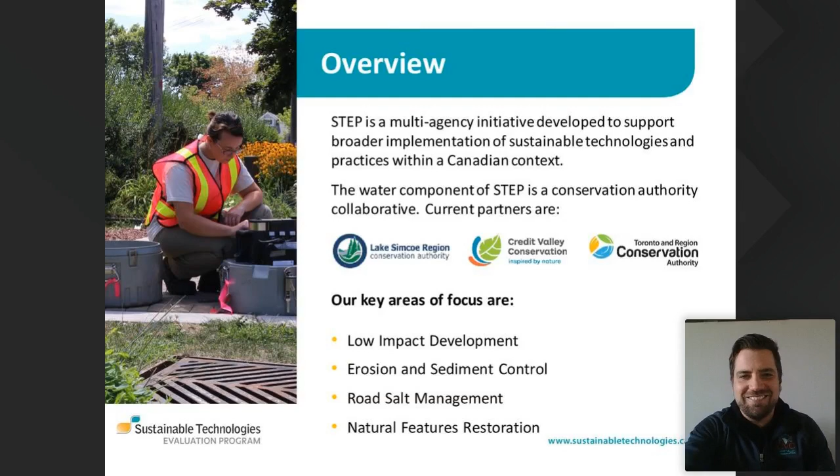Okay, so the next button, just at the bottom of the slide there. Yeah. All right, there we go. Thank you. You're welcome.

So starting at the basics, the hydrological cycle is a four-step process. It rains, it lands on the ground, the sun comes out and heats up, water evaporates or transpires from plants and vegetation, rises up, and as it cools forms clouds, and then comes back down as precipitation. As you can see from the slide, the way the landscape is formed directly impacts the flow and movement of water. So when we put buildings, cities, towns and communities there, that has an impact on the hydrological cycle.

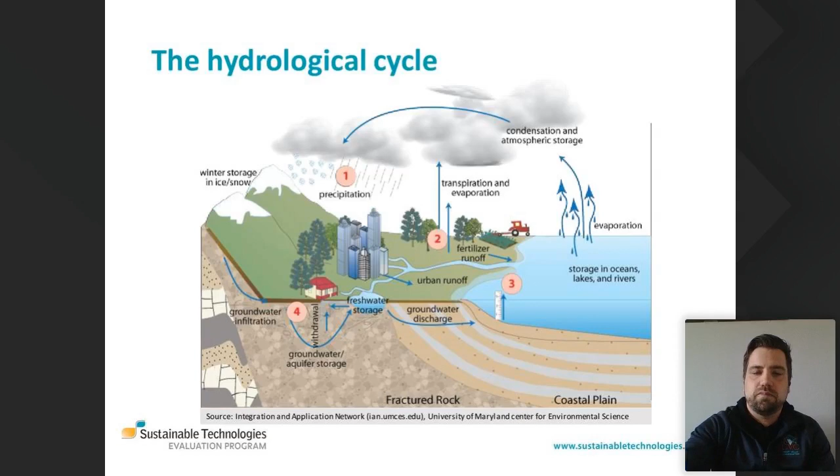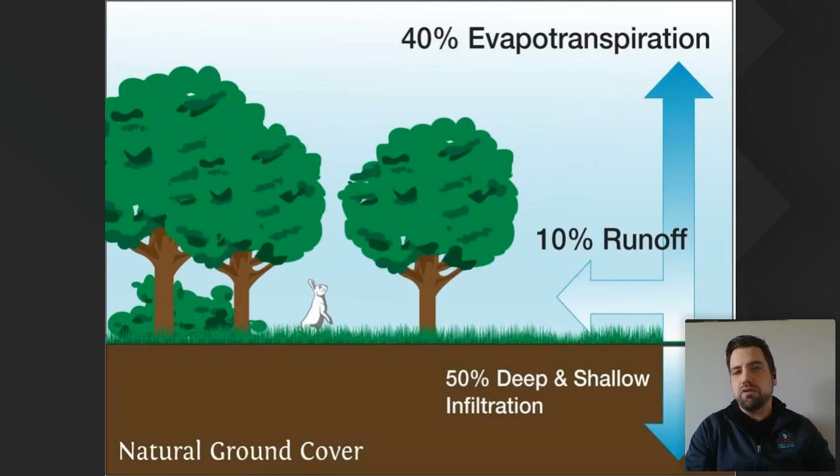So in undeveloped conditions, what we typically see is most of the water, so 40%, is taken up by trees and vegetation, and then 50% is infiltrated into the ground, and only 10% of it actually comes in the form of runoff, which then goes into a receiving creek or a stream or river or lake. So that's without that parcel of land being developed.

Then as we moved into those cities or into towns, we're obviously increasing the hard surface footprint. So we're removing that natural vegetation, we're removing those soils, and then we're hardening those surfaces. So one can only guess, right, as to what happens. Obviously, if you have a hard surface, you're increasing your amount of runoff, and you're decreasing infiltration, and you're also decreasing evapotranspiration.

So there's been a lot of studies that have shown these relationships between hard surface footprint and the health of the watershed. So in that statement at the top of the slide, we talk about pervious versus impervious. As soon as we go beyond 10% impervious area, so hard surface footprint area within a watershed or the area draining into a receiving creek, we have a negative impact.

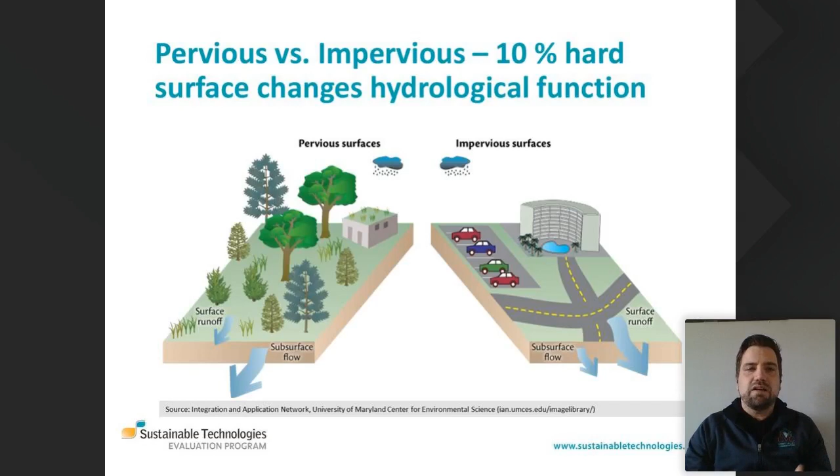So that's that relationship. So if we look at this relationship curve, it's saying the same thing as the slide before. As soon as you go above 10%, you go from a protected watershed to an impacted watershed, or you go from a protected stream to an impacted stream. And as soon as you get to 25%, that's where you start to see severe degradation of our natural water resources.

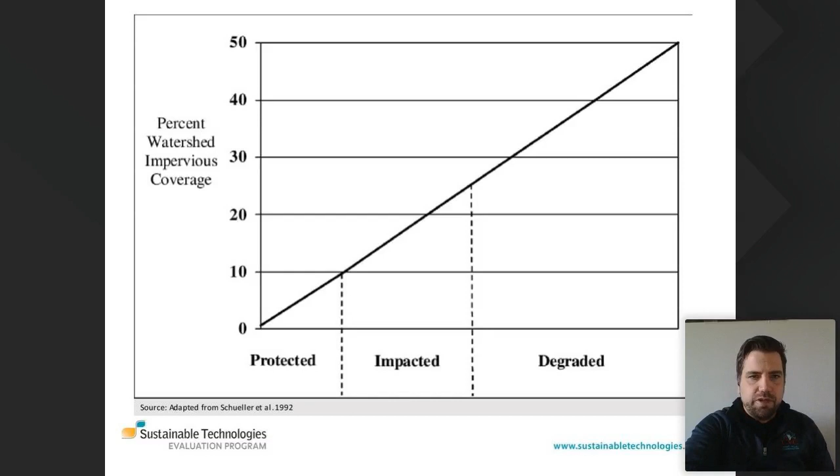So why is this all important? Well, it costs a lot of money to treat water. It costs a lot of money to find clean sources of water. We cannot develop a parcel of land if we don't have access to clean drinking water. And the impacts to our runoff directly impact the quality of drinking water that we have either in the ground or within our receiving streams.

And this isn't unique to Mississauga. It's not unique necessarily to Milton, but the map here shows the progress of development. So the stuff in light gray was really development up to the 1970s and 80s. And then as you get into those darker grays, it goes from 2001 all the way to 2011. So you can see the expansion of cities and how the hard surface footprint of the Golden Horseshoe or the greater Toronto area has increased over time.

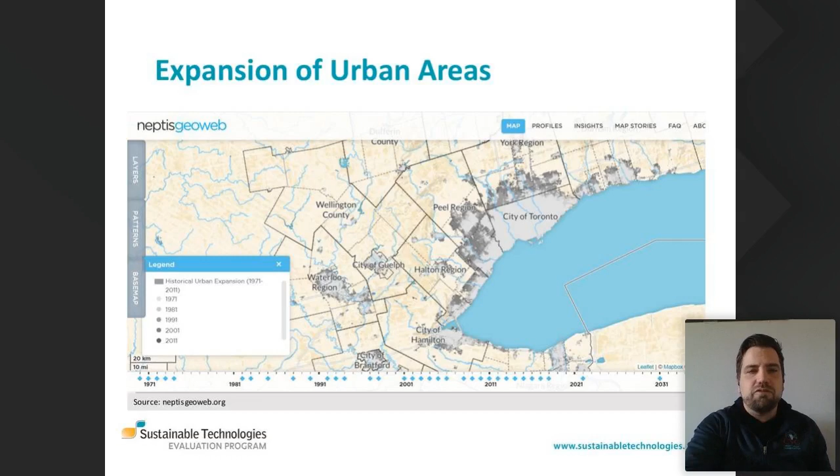So what does that mean for water management? Well, it's got to go somewhere. And where does it typically go? Let me restart from that. Everything pretty much built up to 1991, between 85 and 91, doesn't have any formal treatment of stormwater management. It doesn't have flood control, and it wasn't built to meet any water quality standards either.

So what we see here on this slide deck is essentially what is for the vast majority of the GTA, including Milton, including Kitchener, where I live. So water is collected, goes off of roofs, down the downspout, out towards the driveway, into the road, into the catch basin, and then out to a receiving stream. So there's no treatment. Water is quickly and effectively conveyed from our cities into a receiving stream.

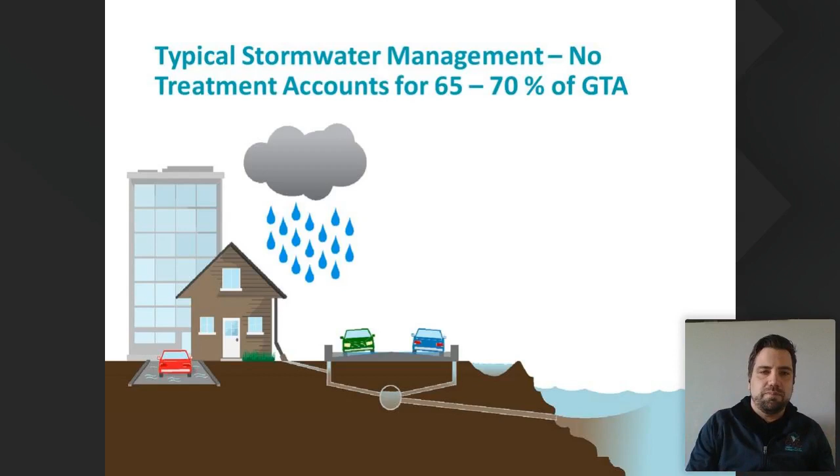The challenge or the problem with that is that type of management of water has impacts to our receiving streams and to the Great Lakes, to our groundwater, and it causes a lot of issues, a lot of damages, and this is what we have seen quite extensively over the last 20 years. So we've seen a rise in high intensity rain events.

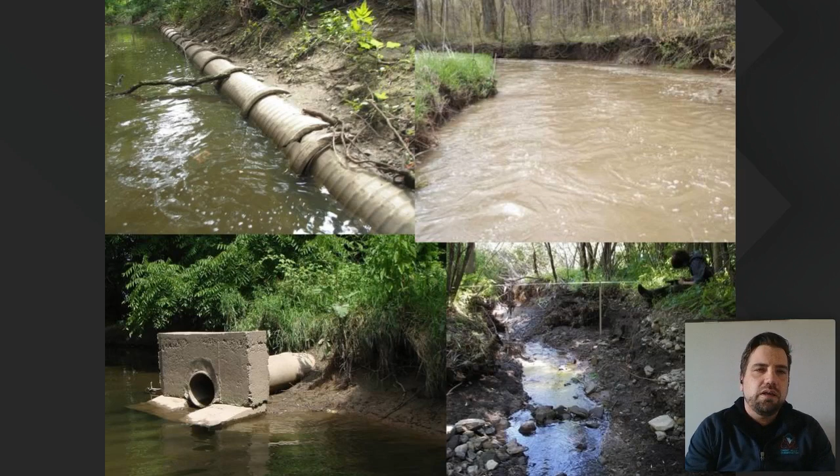So here are some shots. This is Fletcher's Creek in Brampton. So it flows from Brampton and then it outlets into the Credit River. And this is a challenge that municipalities are dealing with. So over time, because of these high intensity rain events, we cause erosion, and it erodes away where our infrastructure is. So often we use our river corridors to also place critical infrastructure.

So at the bottom left, we have a stormwater outfall. On the top left, we have potentially a water main or a sanitary pipe, something conveying that water from one point to another. Here we have base flow, higher increased conditions in terms of flows after a rain event. So this entire watershed has stormwater ponds, but even with stormwater ponds, we're seeing these ponds all release the water at the same time, which has negative downstream impacts. And then in the summertime, we tend to have very low base flow conditions because not enough water is getting back into the ground.

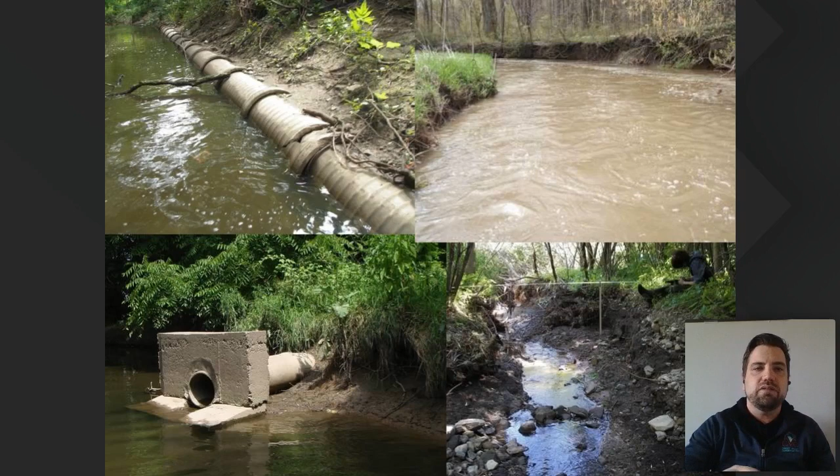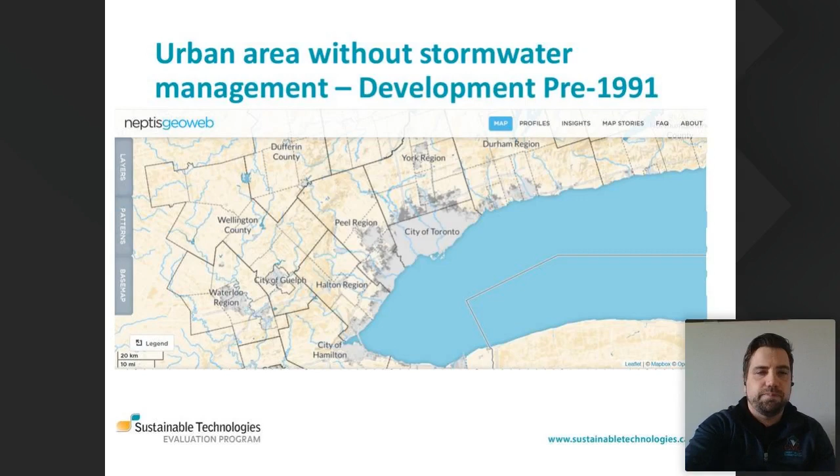And as I highlighted before, we're seeing a greater frequency of what we say 1 in 100 year storm events happening over the last 14 years, but in general, it's been over the last 20 years, because we have the storm event in 2004 there. So in Mississauga itself, we had a flood event in 2005, and then another one in 2013, and then we had a flood event in Burlington in 2014. Kitchener's had a couple in 2016. So there's been a number of events, so it's becoming quite a common problem to deal with. Hard surface footprint, lots of water, and big areas within existing cities where there's nothing holding back that water.

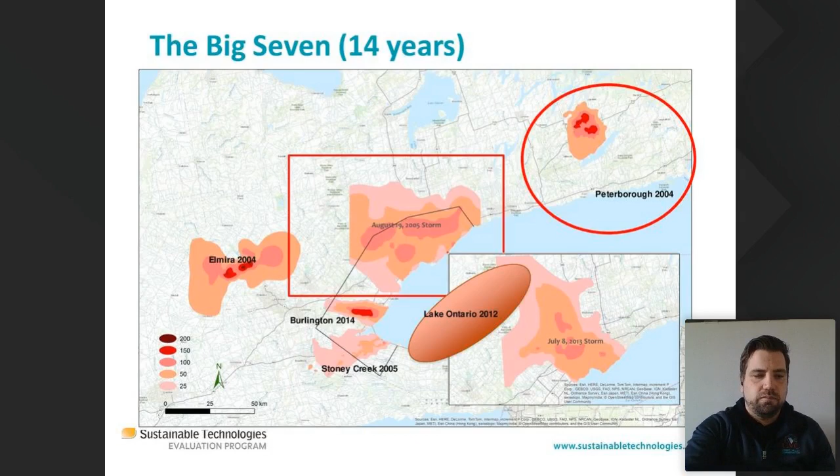Basement flooding is on the rise. Water damage to homes is now the #1 expense for insurance companies. So it's also a struggle for not only individuals, but the companies that are insuring these individuals as well. And then for municipalities, before we showed you some infrastructure within the Fletcher's Creek corridor being eroded away. Well, after this water collects under the bridges, often stuff's ripped apart. So here was a shot, I believe it was on Dixie Road in Mississauga after the 2013 flood event. But again, all this stuff needs to be repaired, replaced, and it's quite expensive.

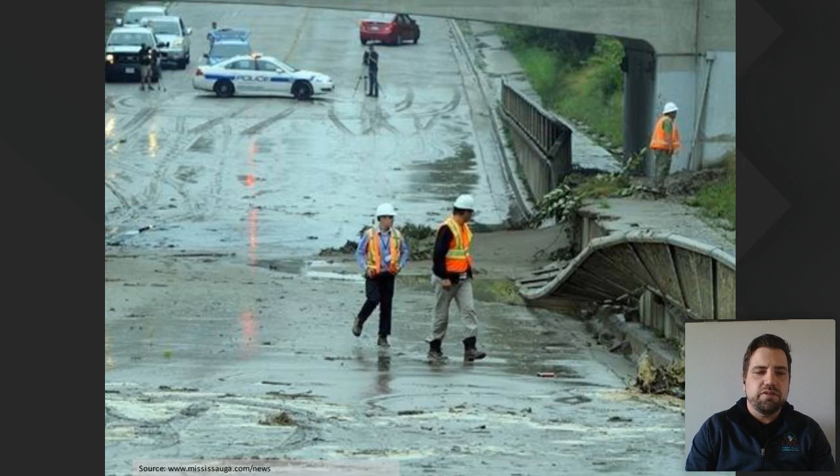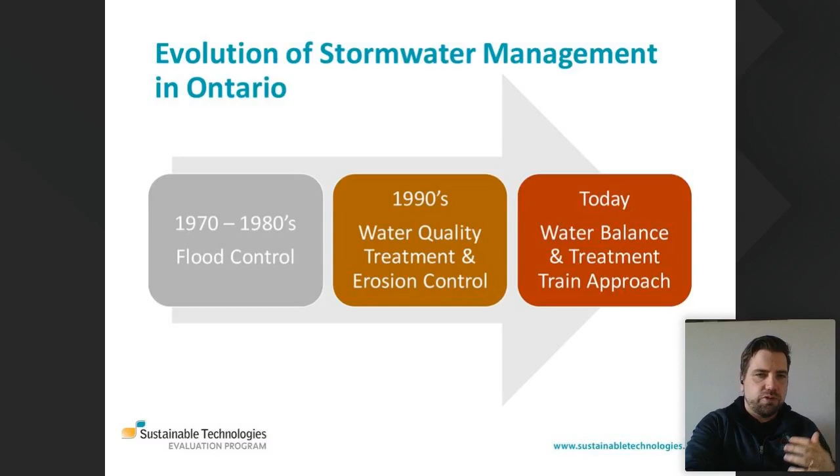So as I highlighted, pretty much up to 1991, we only had very minimal stormwater management within existing cities. And most of it was just quickly conveying water from property or from hard surface to a receiving stream. After 1991, we got into looking at water quality and trying to make improvements as ways that we could treat runoff to reduce the amount of sediment being dumped into receiving streams. And then now what we're focusing on is not only water quality, but also water balance. So looking at infiltration capacity, trying to get the water back into the ground, being taken up by trees, vegetation, etc., so that when it rains, water is going into the ground, and only a portion of it is turning into runoff and going into receiving creeks. So for us to do that, we take what we call a treatment train approach or an integrated water management approach.

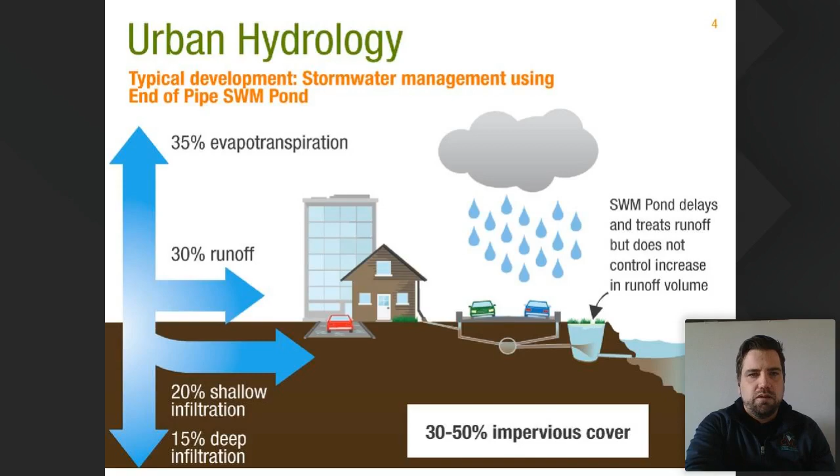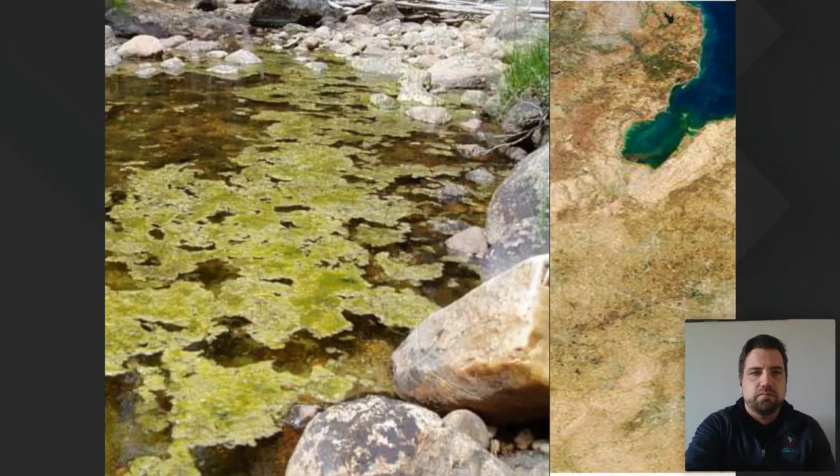So the first step of what we saw is, okay, we need to provide flood control and erosion control. And this primarily took the form of stormwater ponds. And then as we started focusing on water quality, some of the reasons why were because we started seeing algae blooms. So even though most of the focus has been in urban areas, we get deposits of phosphorus making its way into receiving creeks, and then that has an impact on those creeks and the water quality found within them. And eventually those creeks end up draining into our Great Lakes system.

I was originally born in Chatham-Kent, and Chatham is, if you see Point Pelee, I don't know if you guys can see my mouse, but that whole area now struggles with algae blooms throughout the summer period. It's not like you can go and jump in the water. You kind of have to see where the algae bloom is. And so that impacts recreation, it impacts tourism, and it also impacts drinking water. The city of Toledo had to shut down their water intake because they had cyanobacteria, which is found in the algae blooms, and they couldn't provide drinking water to their city for 3 days, which had a $40 million economic impact. So quite significant.

So that's why we're really focusing on this kind of integrated stormwater approach, integrated stormwater management. And kind of the flashy term is the green stormwater infrastructure approach. So what we're trying to do is not just treat it before the water empties into a creek. We're trying to treat it where it lands as it's conveyed from point A to point B, so treating it along the path, and then treating it at the end point before it empties into the creek.

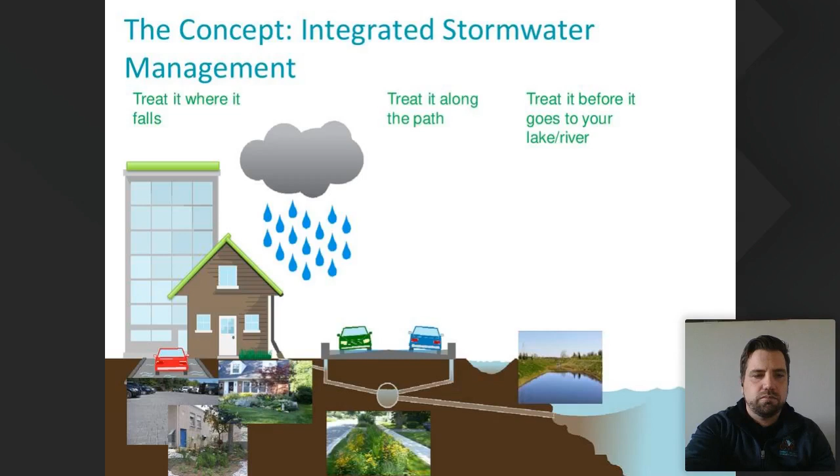So it kind of follows the slide deck here: treat it where it falls, treat it along the path, and then treat it before it goes into a lake and river. So this first kind of rule or approach to integrated water management from the start is we try to minimize or reduce the hard surface footprint.

Now, it doesn't mean, I know with the landscaping industry there's obviously big business in hardscapes, and that can still remain. And there's lots of different options now, like pervious pavements or porous concrete. So it's really about, if we can avoid it, we try to minimize increasing the hard surface footprint. If we can't, there's alternative products and materials that can still provide a hard surface footprint, but also allow for that water to soak through. We'll get into that a little bit further along.

The other big piece too is protecting existing green space or vegetation. So if there's a woodlot, if there's a woodland, if there's trees, we want to protect those features as much as possible. We don't necessarily want to take them down to start something new. We want to protect what's there and enhance it if possible. And then lastly, it's really about increasing vegetation and plantings. You're really trying to increase the disruption to the flow of water.

So by including a diversity of vegetation and plants, if water's coming out the downspout from the roof and it's just straight grass, that water's going to fly right through it pretty much. But if you're putting gardens and plantings, etc., that's going to have a huge impact on disrupting that flow. It's also going to suck up that water, and that water is going to be lost to evapotranspiration.

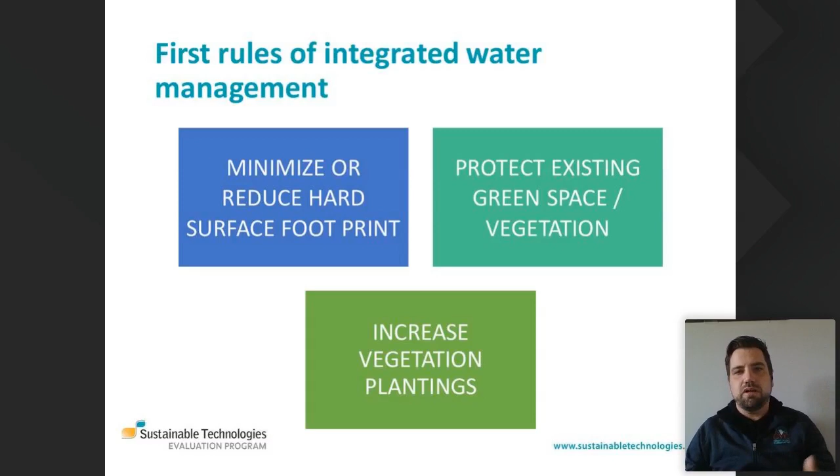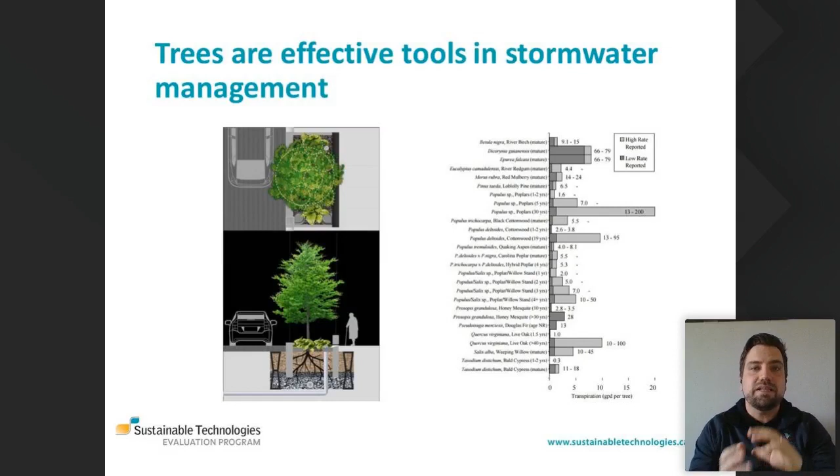So if they're losing, I think it goes up to 20 gallons per day, you're looking at 50 to 100 liters per day of water being lost to the atmosphere. That's quite significant. And it'd be quite costly to try to engineer something to replace that value of just keeping that tree there.

As we get into these more engineered applications, there's a diversity of green stormwater infrastructure or integrated water management that can be applied to different land uses. So not only private property, but also public property. So I'm just going to highlight some of those to you guys. So we saw that shot of Square One at the beginning, back in '73 and then back in 2016.

And that's been a problem area for the City of Mississauga, as you can see from the amount of hard surface footprint that they have. So they've had quite a bit of flooding within that area. It's called Cooksville Creek, and the Cooksville Creek watershed. So they're looking at innovative ways to manage and treat stormwater. And Elm Drive was designed and constructed back in 2010. It's one of the first projects that I got involved with. And we've done substantial monitoring of this project.

And essentially the water is making its way, the road is graded towards first a permeable paver parking lay-by, and then any excess water is collected by catch basins, and then they have lateral drains emptying that water into what we call bioretention planters, but essentially they're rain gardens.

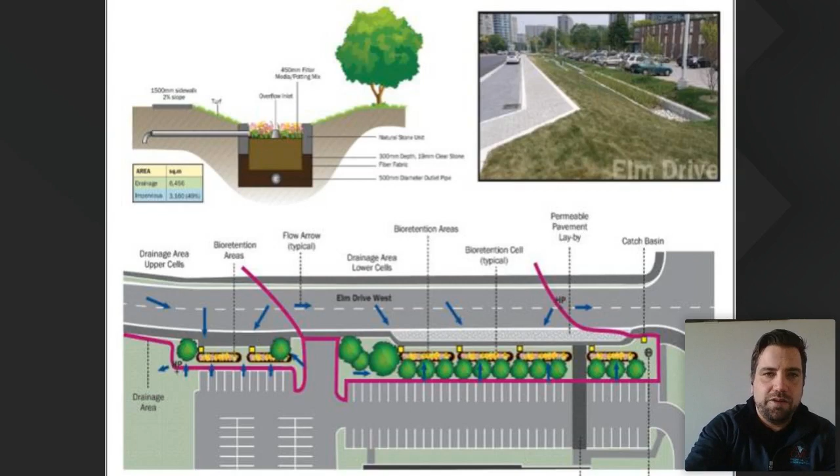Oh, perfect. This is showing you exactly what I was explaining. So if you follow the path, those blue arrows show you the direction and the flow path of the water and how the water is then collected and then making its way into those bioretention planters or those rain garden features. And this has done quite an effective job. So Carrie, if you don't mind playing the first video.

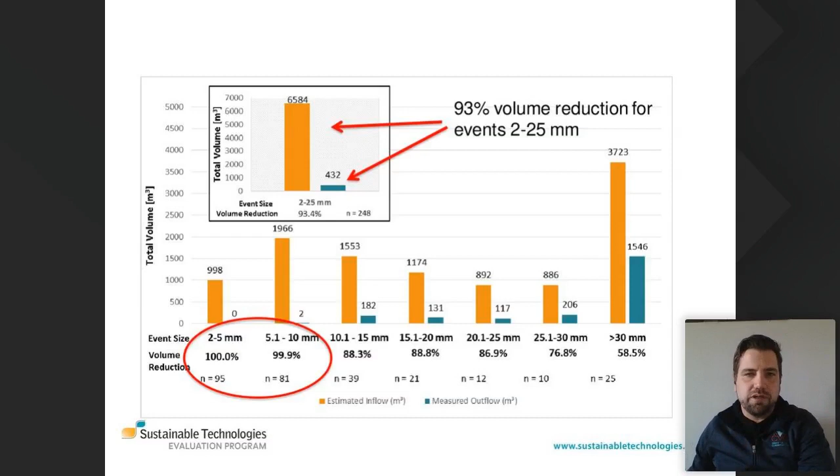And what we've seen through that monitoring is rain events from 2 mils to 25 mils, so that's 1 inch, we're seeing a 93% runoff volume reduction. So we're monitoring the outfall of that bioretention Elm Drive site. We're only seeing runoff leave that site maybe one storm event every month. So it's quite substantial. Even with events that are 30 mils, so like 1.2 inches or greater, we're still seeing close to a 60% reduction in runoff volume. So that water that would have flown directly into Cooksville Creek is now getting treated, infiltrated, filtered, cleaned, and cooled. So it's pretty exciting to see those results.

So this kind of describes the criteria by which we're evaluating the Elm Drive site. What we're seeing is that it was designed to only manage 15 millimeters, but it's completely infiltrating up to the 24 millimeter event. It's designed to remove 80% total suspended solids or sediment. It's removing 88%. Total phosphorus, So if you think about those algae blooms, Lake Erie, it's removing 91% of the phosphorus that would have flown directly into Cooksville Creek and then into Lake Ontario.

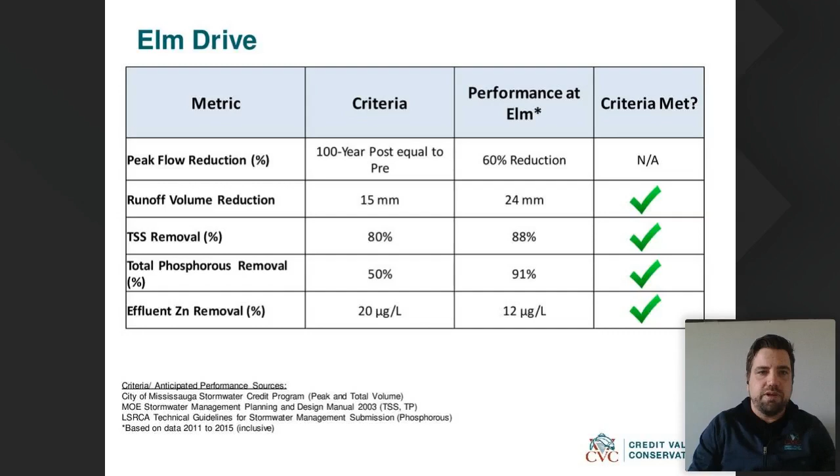And even metals, we have zinc removal. The criteria is we're going to try to get 20 micrograms in terms of the concentration. We're only seeing 12 micrograms. So metal load reduction is quite substantial. From a flooding piece, we're seeing a 60% reduction in peak flows. Originally, green stormwater infrastructure primarily focused on water quality. It wasn't so much flood control. But we're still seeing what we call peak flow reduction. So there's a lag time from when that water leaves the site, and it takes pressure off the municipal system and reduces the risk for downstream flooding. So it's quite exciting to see.

I apologize if I'm coming up really close.

And then the cumulative impact of that can have benefits against urban heat island. And urban heat island, the impact measure of that is actually people dying from hot temperatures during the summer period. So if we can reduce the overall amount of people going to the hospital by putting in more green stormwater infrastructure, that's fantastic. And these are some of the co-benefits of doing this type of work.

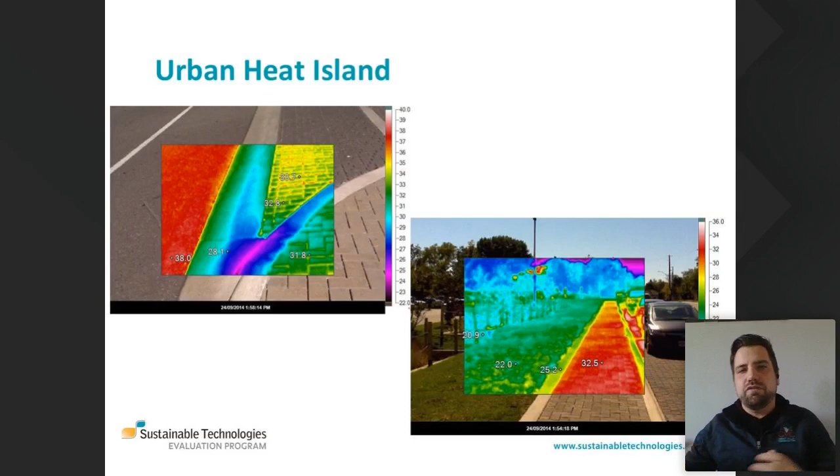The other thing too that is a big problem with urban areas and stormwater ponds, you saw that 38 degree Celsius temperature of asphalt, that heats up water. So when the rainfall hits the asphalt, we've all been in summer storm events where you see steam rising off the road. Well, that has a negative impact on receiving streams as well. We have sensitive fish species that get impacted by hot runoff flowing into the receiving streams. Redside dace is a local threatened species that is impacted by what we call thermal pollution.

And so what we also evaluate from this site is the ability of green stormwater infrastructure to cool the water as well. So I said it cleans, it cools. Well, here's quantitative proof that it actually does cool the water. So when it came into the site and when it's leaving, we're seeing a 5 to 7 degree temperature reduction.

So that's quite substantial. If we were to compare that to a stormwater pond, we see a 5 to 7 degree increase in temperature because it increases the surface footprint of the water. When it flows in, it gets heated up, and then when it leaves, it's leaving at a hotter temperature. So green stormwater infrastructure compared to conventional stormwater ponds has quite a benefit in terms of water cooling.

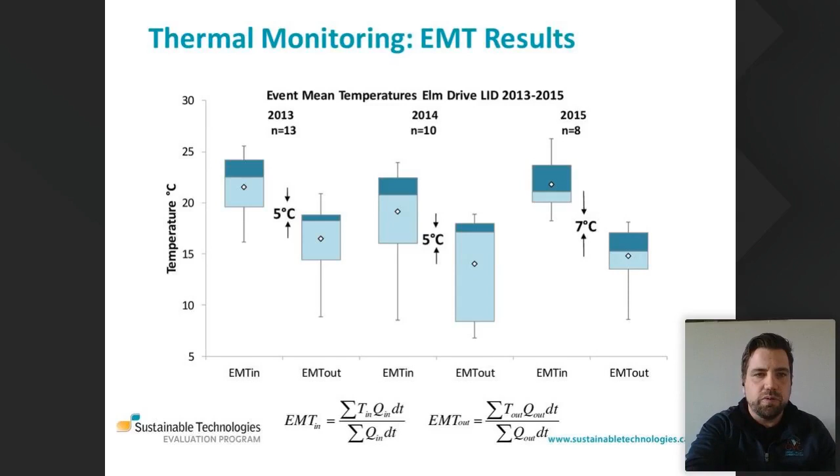The other site that we looked at too, IMAX, and they did a parking lot expansion. They had high groundwater here. And so we looked at two different technologies. We did permeable pavers, and then we also did a bioswale within the existing parking lot island. So if you don't mind playing that video, Carrie.

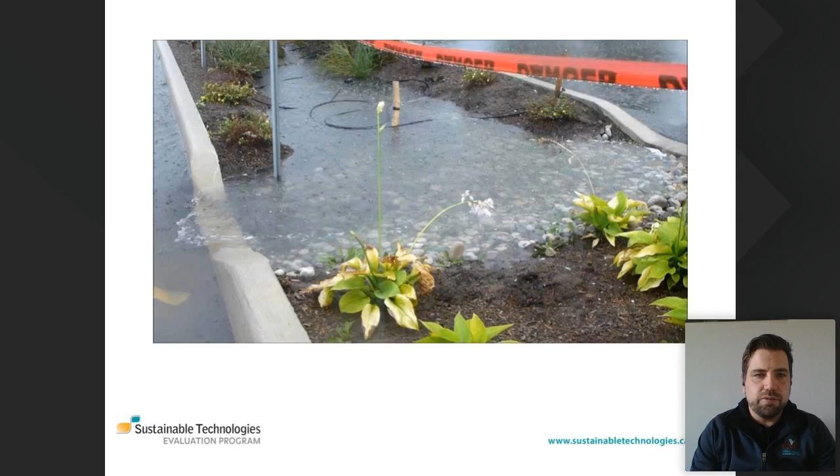It's another video during a rain event, but it shows you here the water moving from the parking lot into the bioswale, making its way through the plant material, through the vegetation, and then through the soils, and then it leaves the site. So again, instead of that water immediately rushing off the site, we're disrupting the flow, and we're getting it into these features. And again, it's getting cleaned, it's getting cooled, and the volume of stormwater runoff is also reduced as well. So it's quite interesting.

And we're seeing runoff volume reduction anywhere from 64% up to 90%. And then we're seeing total suspended solids, so sediment. We're seeing substantial reduction in the amount of sediment leaving the site. We're also seeing substantial reduction in phosphorus. So we're at 57% on the low end, up to 90% on the high end.

And that's total phosphorus. So it gives you dissolved phosphorus concentration as well, and total phosphorus concentration. But in terms of the load or the mass of phosphorus being reduced, it's anywhere from 57 to 90%. So again, when you take the cumulative impact of these technologies and you apply it wide scale, that's really going to have an impact on our receiving streams, but also the Great Lakes, which is our drinking water source.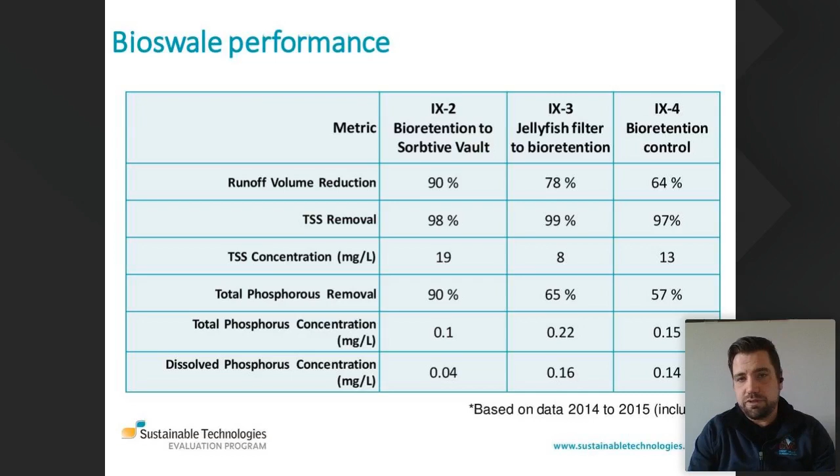And then we get into some of these softer projects. So schools are great spots to implement these types of technologies. They act as community hubs. It's a good way to showcase different ways to manage stormwater not only on the school property but on people's property potentially. So we've built a number of these projects along the way.

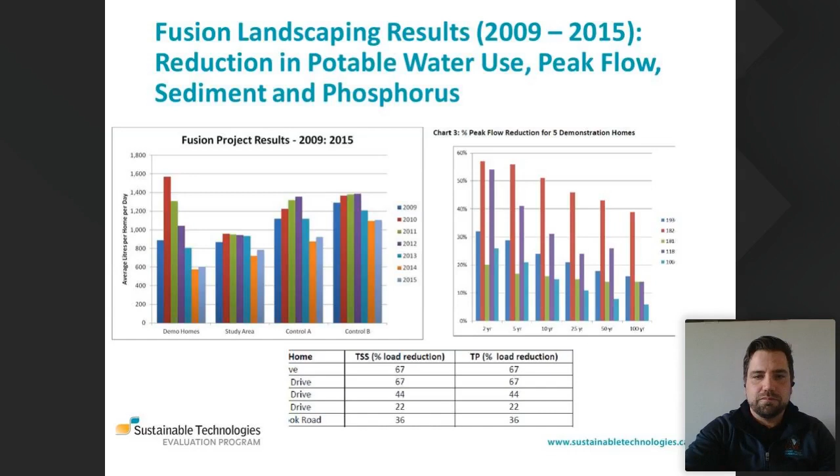And really what we want to do is get to this wide scale application point so that we see the cumulative impact, and then we see healthier streams, healthier creeks, a healthier Great Lakes, and then a healthier us as well, because the Great Lakes, that's our drinking water source, and it's also recreation. It's an economic, it's a tourism attraction, etc. So it has economic benefits as well. So I think that's it. I don't know if I have any more.

Oh, okay. So just to break it down a little bit further, the course is 2 days, and focuses on design, install, and maintenance of Fusion Landscapes. There's an exam at the end, which is given by Landscape Ontario. And this is Landscape Ontario's program. And then there's a certification process. So that's all directed by Cassandra and Sally Harvey.